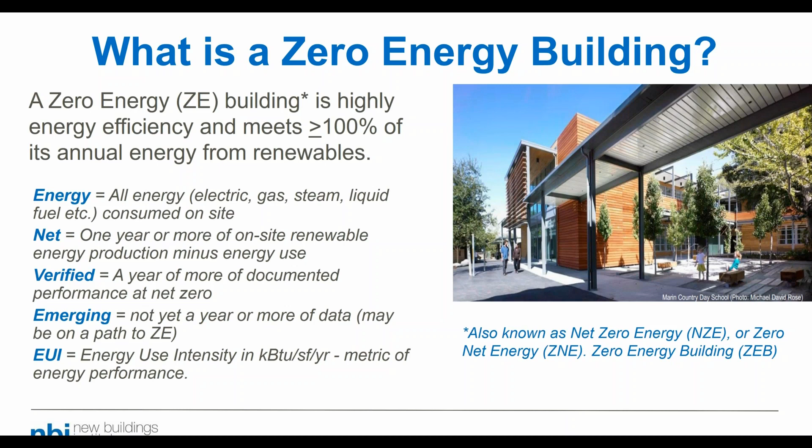When we talk about zero net carbon, this is a surrogate for the emissions impacts of the building and its operations, and maybe potentially including its construction. In this definition, for net zero carbon operations, it is taking that balance of the amount of energy used—the carbon impact of the energy used is equal to or less than the amount of carbon-free electricity generated or procured. This is the first theme you'll see throughout today's presentations: how cities, states, and other jurisdictions are beginning to address the carbon metric in building sector policy.

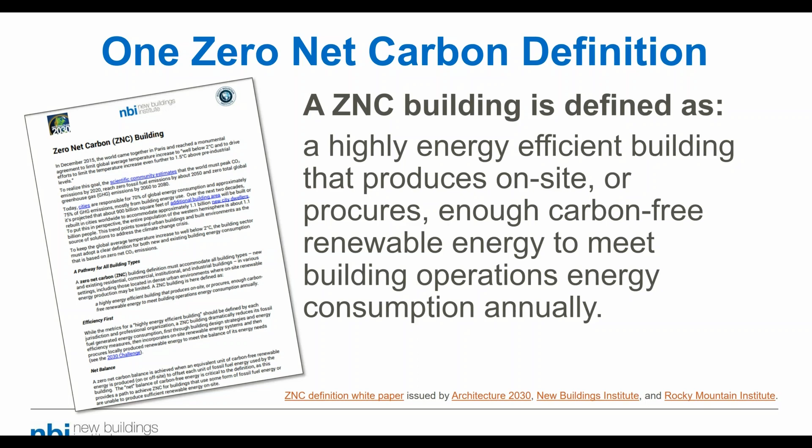Fortunately, there is an excellent publication that was just released in the past month by Adam Hinge for the International Partnership for Energy Efficiency Cooperation. This is an excellent summary of worldwide uses of zero energy and zero carbon definitions, and some summary of policies. We will have this link on our website after the presentation.

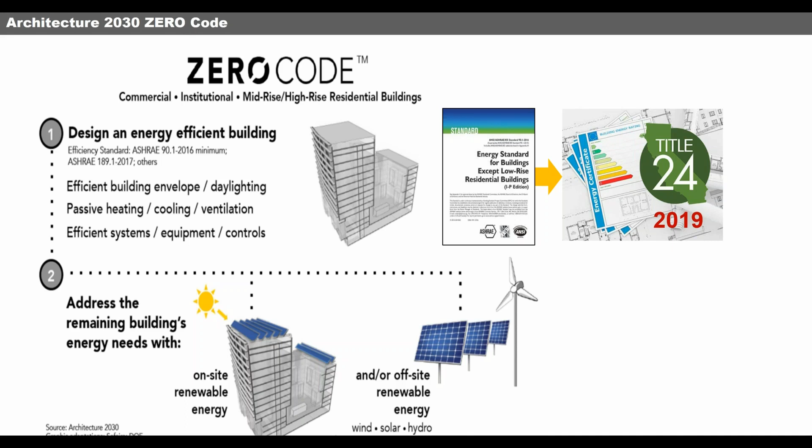The national and international Zero Code was released in April, and it's really pretty simple. The first thing you do is design your building to be in compliance with the latest version of 90.1. After that, you install on-site renewable energy, or you procure off-site renewable energy to get to zero.

The Zero Code is supported by a website. You can download the code and the supporting documents. There's also 2 energy calculators, one for California and one for the other parts of the country, that can help you determine how much energy can be generated or how much would need to be procured off-site.

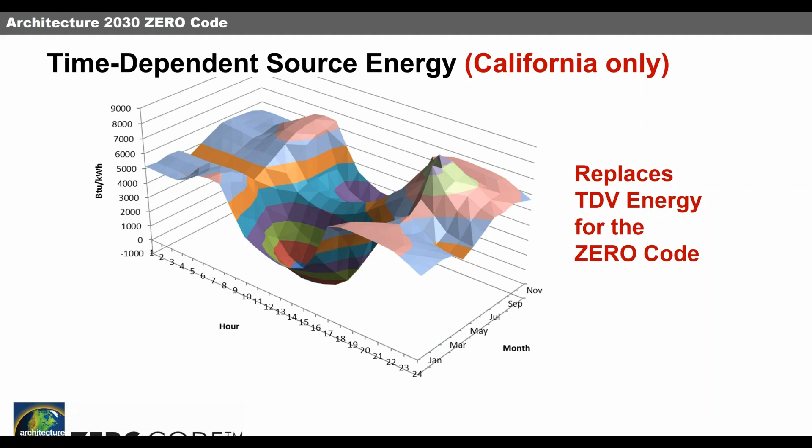Perhaps the most significant innovation with the California Zero Code is the metric we're using to measure energy performance and credit renewable energy. We're using what we call TDS, or time-dependent source energy. TDV, or time-dependent valued energy, is still used for code compliance, but the Zero Code uses TDS. As you'll see in a moment, it provides a strong incentive for grid harmonization and storage.

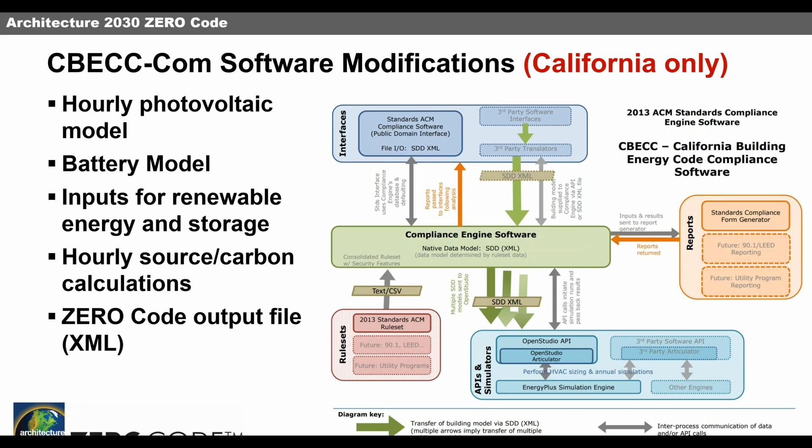Finally, we've worked with the CEC and the developers of CBECC-Com to add features to the official California software to support the Zero Code. This includes a model for PV, a battery model, and also you can look at multiple metrics, including TDS and TDV.

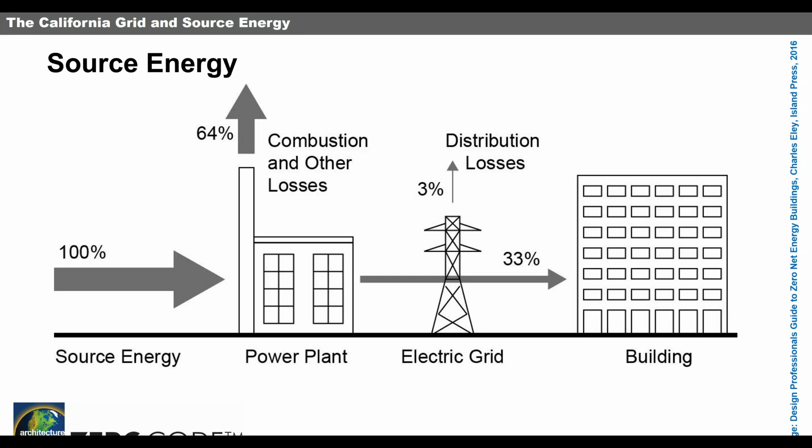Most of us are familiar with the concept of source energy, but with California we have a little bit different twist on the concept. With source energy, you look upstream at the energy used to generate the electricity, and you also consider the electricity lost in the process of transmission and distribution. This is, of course, a very simple diagram, like Thomas Edison's original Pearl Street system in New York.

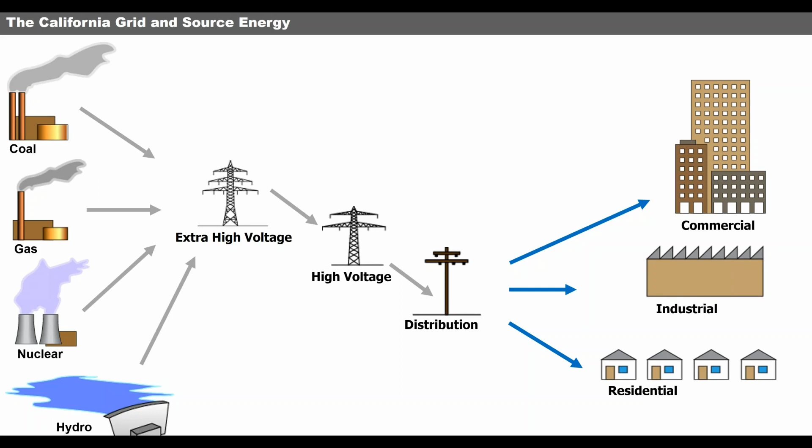But the modern electric grid is way more complicated than the original Pearl Street system. There are multiple generators of different types scattered around, often in remote locations, and these feed into high voltage transmission lines. This power is then stepped down to lower voltages as it reaches customers. Modern grids also have intermittent generators like wind and solar. Power has traditionally flowed in just one direction from central power plants to customers, but this is starting to change with Zero Energy buildings.

A couple of months ago, in May, California had 22 gigawatts of renewable energy on the grid, and solar represented more than half of this, with wind being a distant second.

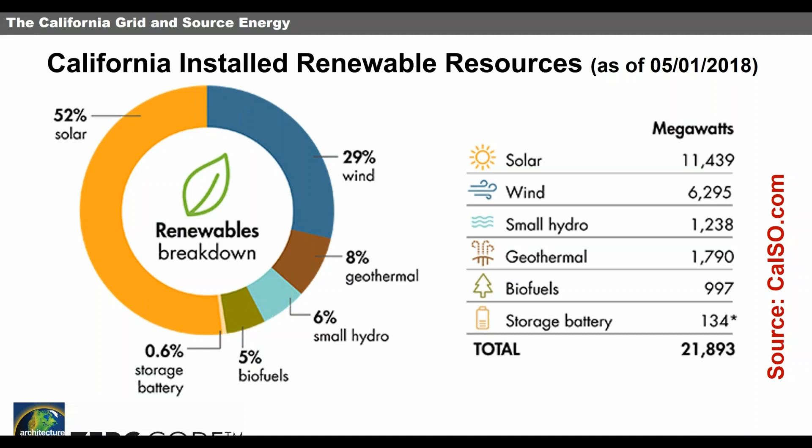In 2017, almost 30% of California's power was from eligible renewable energy sources, and in mid-September, Senate Bill 100 was signed by Governor Brown, calling for California to be 100% carbon-free by 2045. The bill also moves up the target for 50% from 2030 to 2026, and sets some other goals along the way. Right now, the renewable energy portfolios in California don't include large hydro, but for the 2045 goal, they of course will.

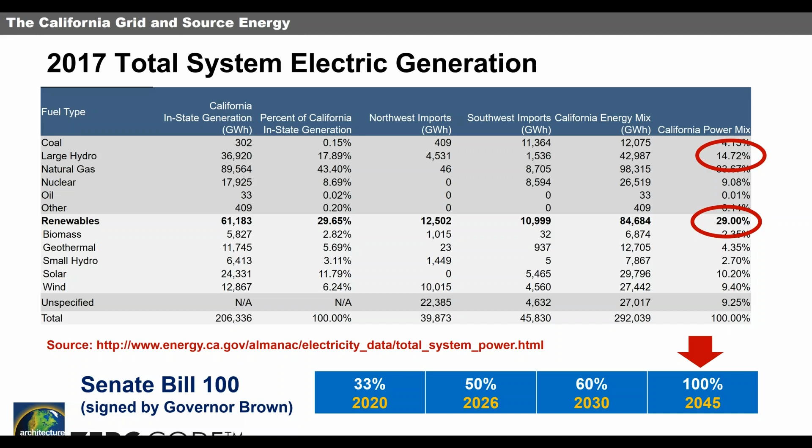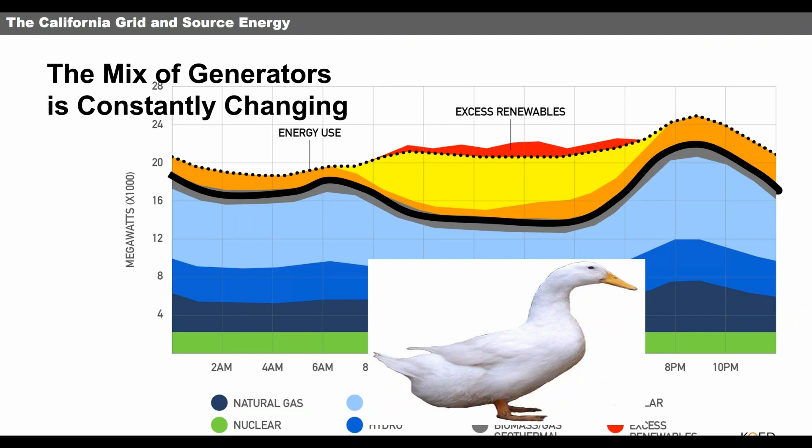This black line represents the net load that must be met by conventional or dispatchable generators, and the space between the solid line and the dotted line begins to form the infamous California duck, and I guess you could sort of see the resemblance.

So on this particular day, if you add load to the grid between about 9 in the morning and 6 at night, the marginal source energy would basically be zero, because that additional load would be met by taking off or reactivating some of the solar capability that's already been curtailed.

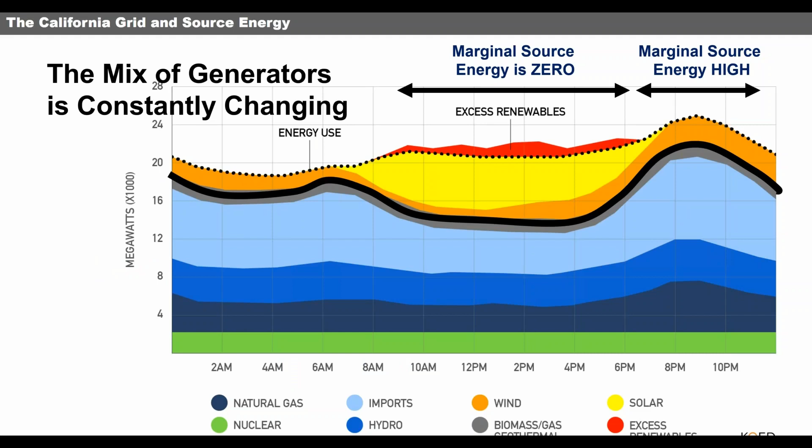However, in the early evening hours, when the sun goes down, the source energy is high, and the gas generators would come on to modulate things.

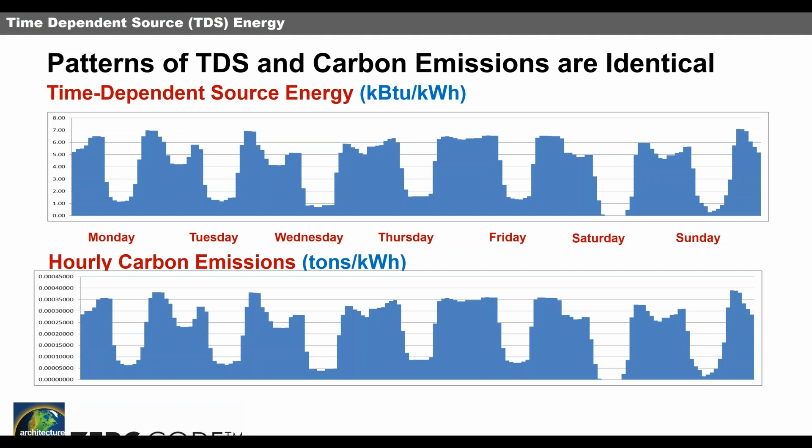So you may be wondering where we're going with all this. We're leading into time-dependent source energy. One of the important features of this is that TDS tracks carbon emissions on a near exact basis. The graph at the bottom shows carbon emissions, and the one at the top shows hourly source energy. Really the only difference between these graphs is the scale, so when carbon is low, so is source energy. You can see in this particular case, there's some curtailment on Saturday.

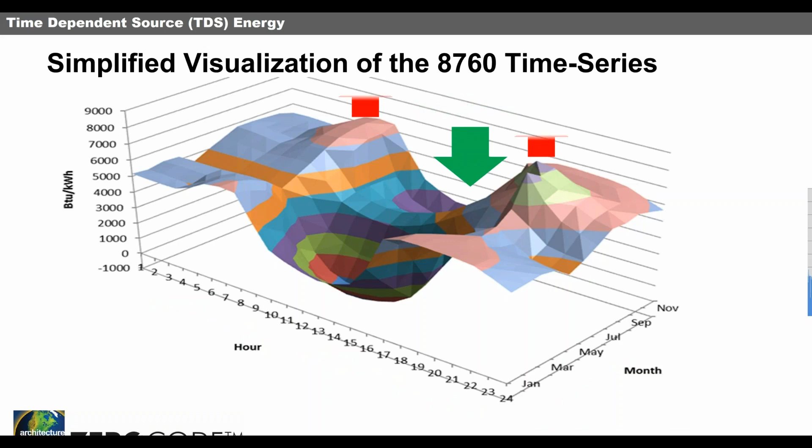TDS consists of an 8,760 time series, but it's easier to visualize this if you look at the average source energy for each month and each hour of the day, which this graph does. This shows how source energy dips in the middle of the day when all the solar comes online, and it also spikes in the morning and early evening when the sun goes down and buildings are still operated. So the lesson here is that during periods of high source energy or high carbon, we want to shift load, and this is what we think the Zero Code will encourage.

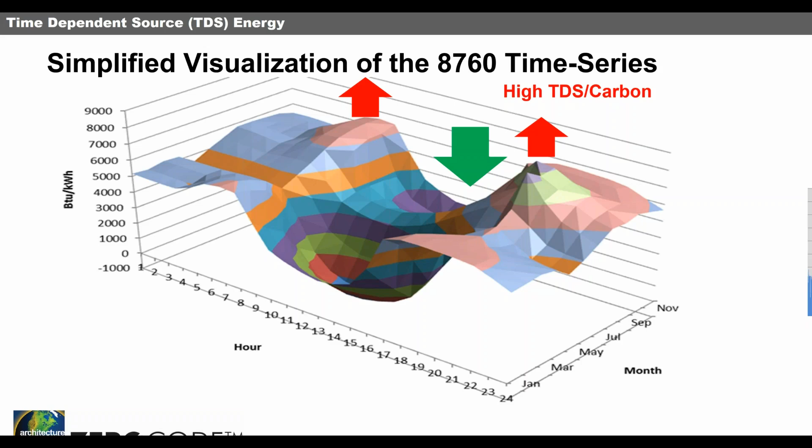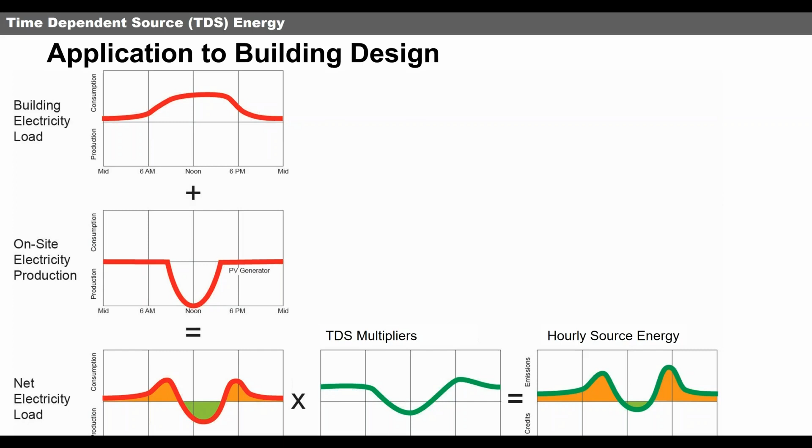So with site energy and most other flat metrics, a megawatt hour of renewable energy from wind, solar, or hydro are all considered equal. But this is no longer the case when TDS is the metric.

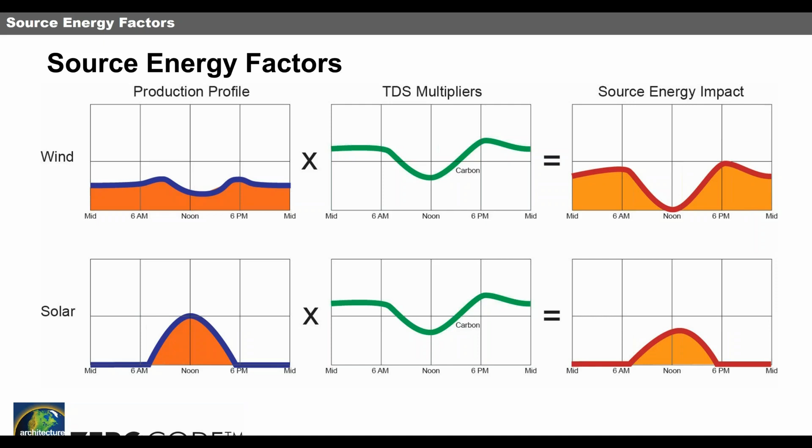This slide shows typical daily production for wind and solar. In California, wind typically peaks in the morning and in the afternoon with a lull in the middle of the day, while solar has a big hump in the middle of the day. So when the TDS multipliers are applied to this, the impact of wind is amplified and the impact of solar is reduced. This is the TDS curve that we previously described, or a representative of it.

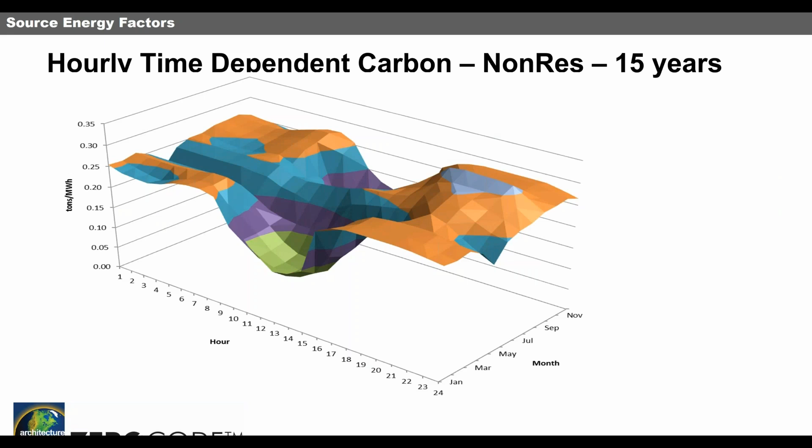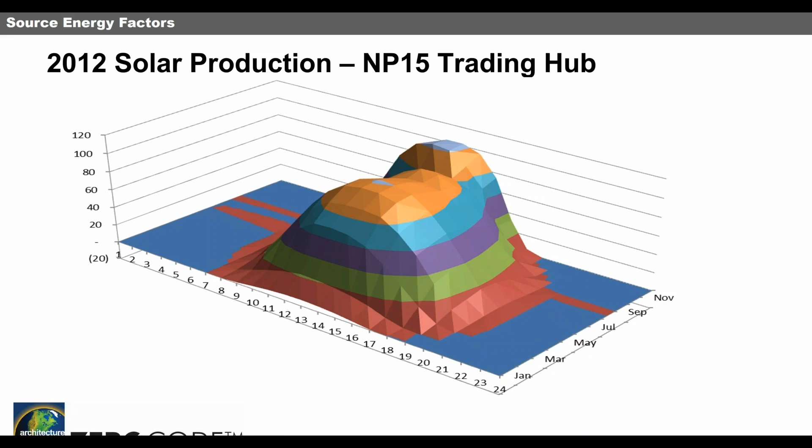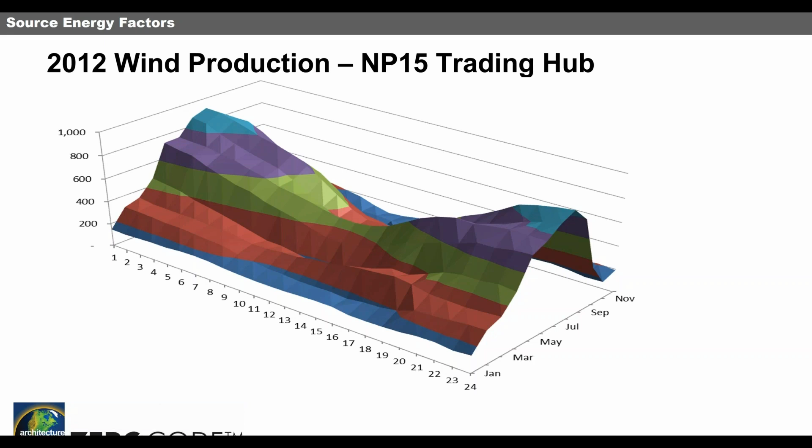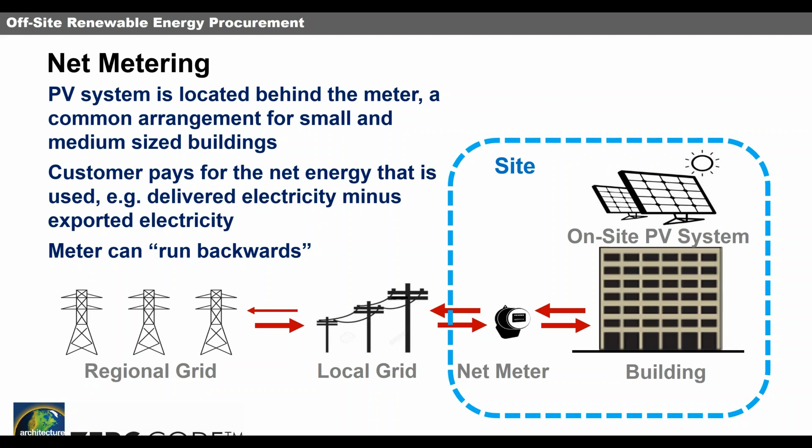So what I want to talk about now is offsite procurement. Net metering is the most common arrangement for small buildings. The customer pays for the net energy that's used. When PV production is less than building use, the PV system supplies the building, but otherwise the PV system can actually pump power directly into the grid, and in this case the meter can actually run backwards.

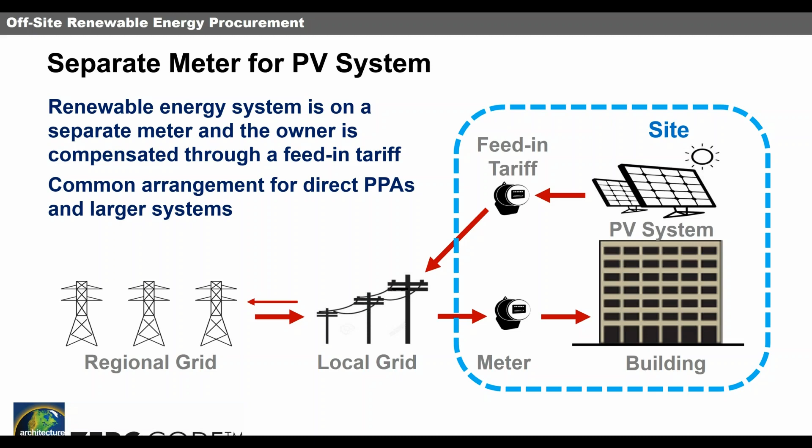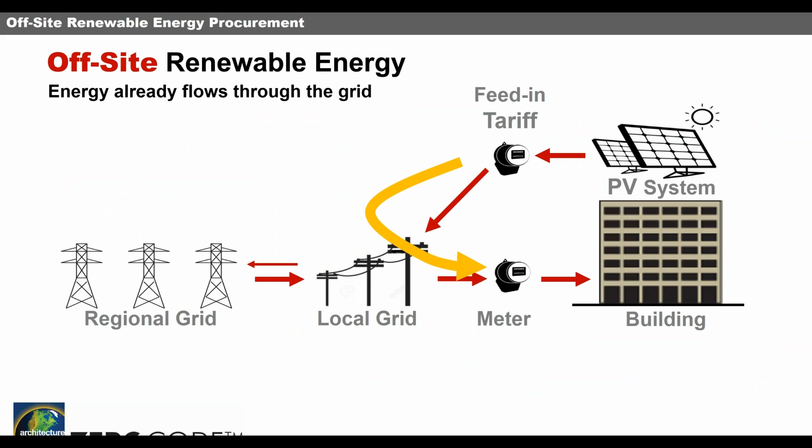So when the PV system has its own meter, we're already using the grid to deliver energy to the building. If we move that PV system off-site, but in the same general vicinity of the building, we can still deliver power to the building, and RECs can be used to track production and make sure that the renewable energy is not double counted, and assign it to our zero energy building.

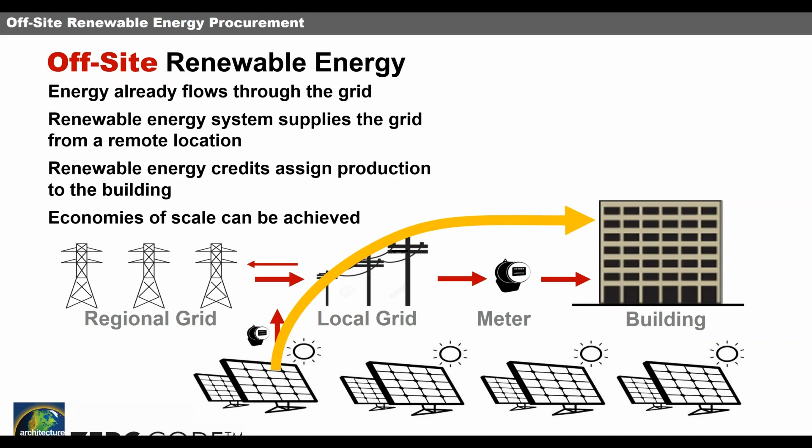So another benefit is when we move off-site, we can build larger systems that are shared by multiple buildings, and we can achieve the economies of scale. This is another benefit.

So there's a number of financial arrangements or procurement options that are already out there for off-site renewable energy, and some of these have been widely used by tech companies like Amazon and Google. We've grouped these into three classes based on the probability of additionality, long-term commitment, and other criteria. The first class has a pretty high probability of additional renewable energy and other benefits. The second class is less desirable.

This includes green tariffs and direct access to the wholesale market. The main problem here is that customers can easily opt out. Our least favorite option are unbundled RECs. We think these have little probability of additionality.

You can go to the Zero Code website and download a document that explains these options in way more detail.

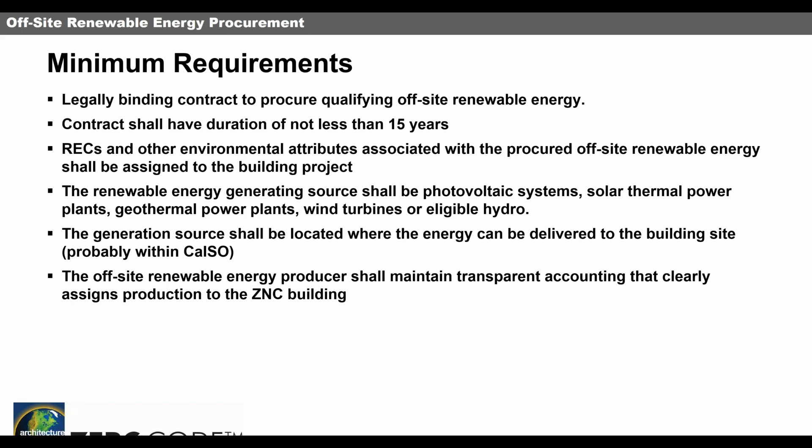So in creating the classes, we considered 9 criteria that we think are important, although some are more important than others. At the top of the list are additionality and long-term commitment, and some of the other things are at the bottom. We've also identified a number of minimum requirements that all of the procurement options must embrace: having a long-term commitment, a legally binding contract. The RECs have to come with it, and several other things that are mentioned here.

The Zero Code uses the concept of procurement factors to account for the additional risks associated with off-site procurement, and we have three separate factors, one for each class of procurement.

To illustrate how this works, you start with the quantity of renewable energy that's being purchased, then multiply it times the source energy factor, and then multiply again times the procurement factor, and the result is the avoided source energy that you can credit towards your building.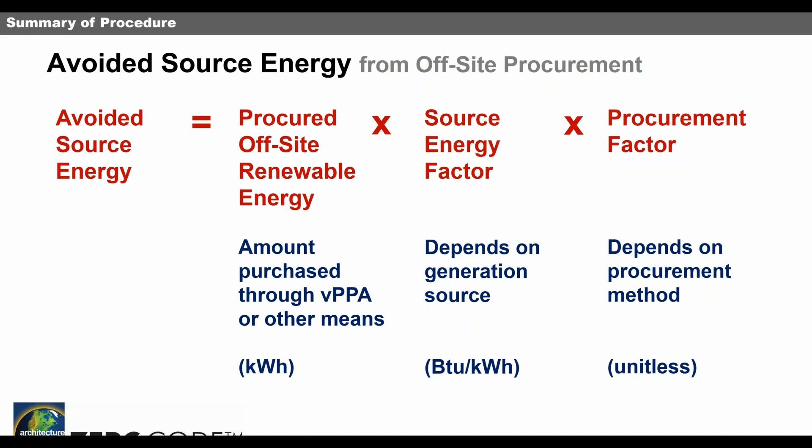It's a simple concept, and as we get more confidence in off-site procurement methods, I think the procurement factors will begin to approach 1. In some areas, they may already be close to 1 if we have a lot of confidence.

Batteries can be installed behind the meter, and you would typically charge the battery in the middle of the day when there's a lot of solar, and discharge the battery in the early evening and in the morning to offset that duck curve we saw earlier.

Conventional thermal mass can also be used to shift loads. In this case, you would operate in a manner just the opposite of convention - you would cool the building in the middle of the day when there's a lot of solar, and then let the building drift in the morning and the evening.

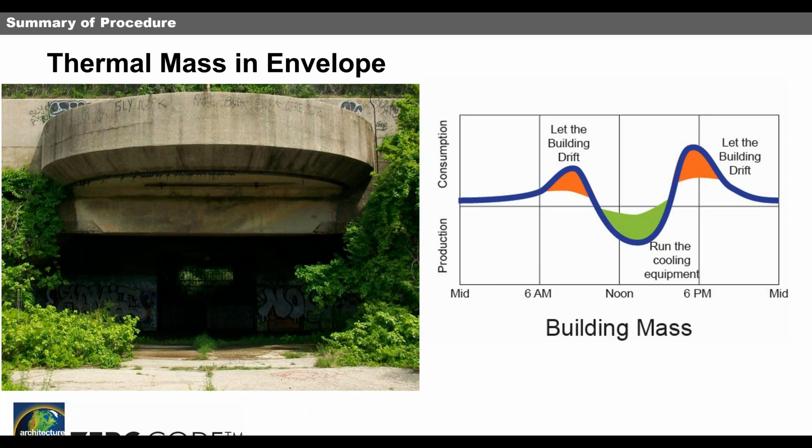Conventional thermal storage can also be used to shift load, but again you would operate it differently. Typically, with thermal storage, you make ice at night and melt it in the day. But with a solar-rich grid, you would do just the opposite - you would run the chillers and make ice in the middle of the day, then shut off the chillers in the morning and evening, and melt the ice during those times.

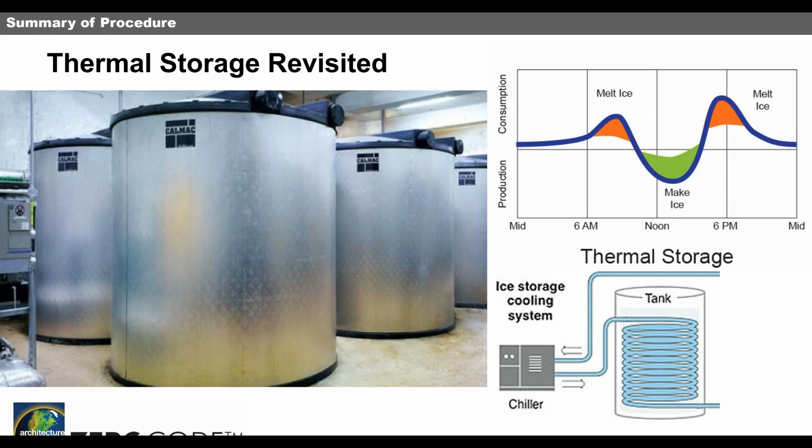Next slide, Connie. Next.

So anyway, the Zero Code for California represents, we think, a paradigm shift in that it directly addresses carbon emissions and encourages more grid-friendly buildings. And also with the offsite procurement, it establishes a framework for tall buildings and energy-intensive buildings that have always sort of been a problem.

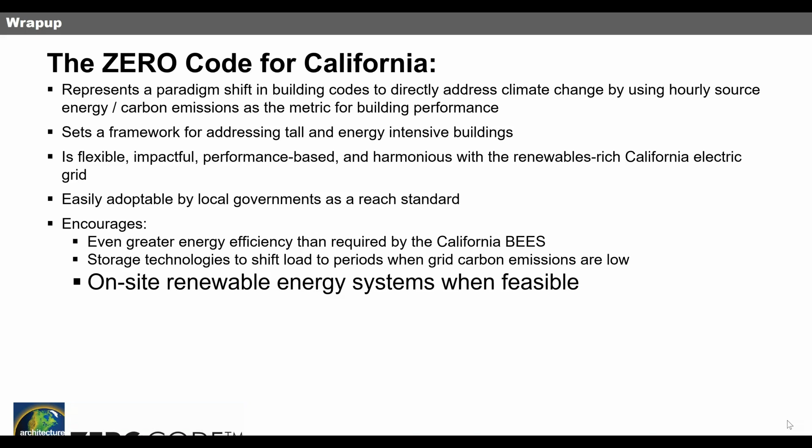If you're interested in learning more, there are several documents available at the website zero-code.org. You can download these documents and they have a lot of backup for what I presented. So anyway, thank you for your time and happy to answer any questions you have.

Thank you so much, Charles. Really excellent technical background for the topic of our webinar today. Having that technical understanding is really helpful to understand how we're going to be moving codes forward.

A couple of questions. One is, at this point, would it be useful or beneficial to orient solar systems to the west to help with the duck curve challenge in places like California?

Absolutely. The guidelines for the azimuth of solar collectors and also the tilt of solar collectors have been based on maximizing annual production. But if your goal is to maximize or offset the maximum amount of hourly source energy, you would consider different tilts and different azimuths. I think that opens up a whole new way of thinking about solar collectors. Tracking collectors look a lot better too, because they can face east in the morning and west in the afternoon, and they have a much higher capacity factor.

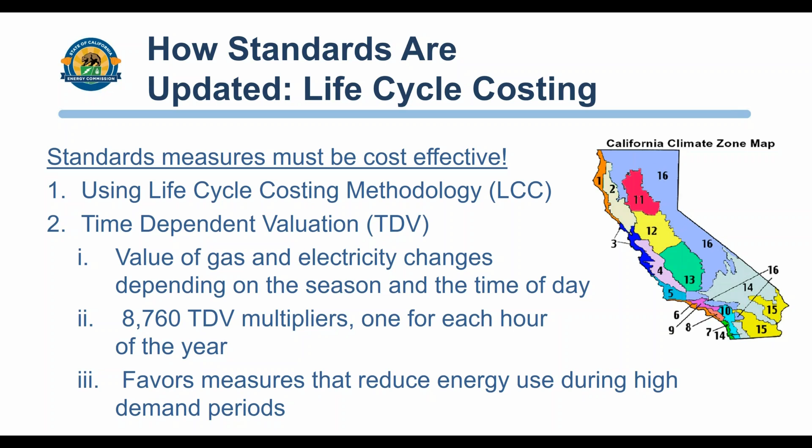Why don't we go to the next slide. I'm just going to go through these really quickly.

In 2019, on the non-res side, we really focused on going to the LED baseline, which was a huge savings, and then did a lot of clarification, including color temperature for indoor and outdoor lighting. Next.

For residential standards, we'll talk a little more about the PV separately, but one of the things we realized is that indoor air quality is one of the things we have to look at. If you have an efficient building and people can afford to run their HVAC systems and move air through, they can control bad indoor air quality.

That bad air quality can come from either indoor sources or outdoor sources. As we found, we were tightening up the buildings, you ended up with adverse indoor air quality issues, either from cooking or other indoor sources, or from outdoor sources such as pollution from vehicles.

So we found that you could actually have filters that went down to PM 2.5 without having energy penalties. That was a huge step we worked with ARB on.

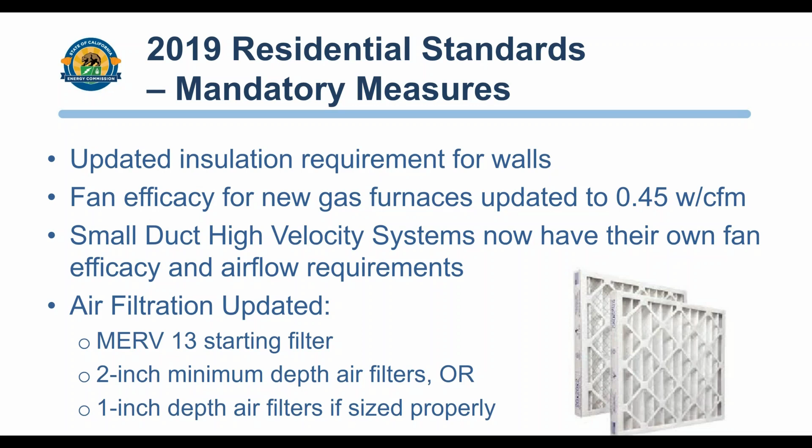That was a realization that we had to make sure the energy use in the buildings was such that people could afford to run their systems, so they didn't conserve energy in a way that caused an air quality impact. Next slide.

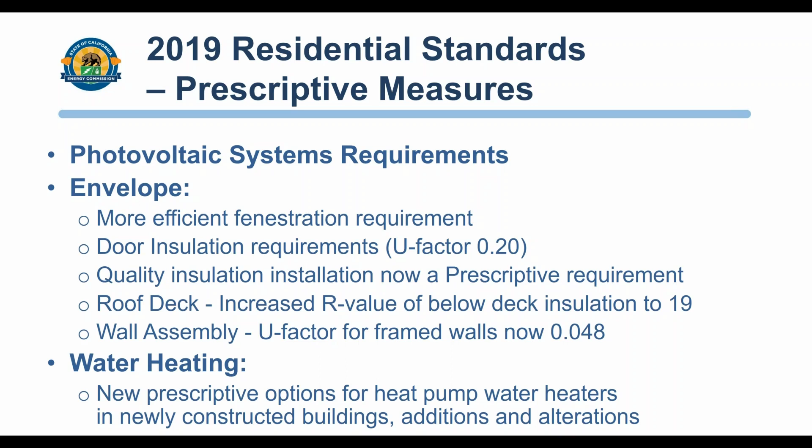One big thing we did for moving ahead to help with either electrification or GHG issues was to work really hard to remove any barriers to electric water heating through heat pumps. We've been doing a lot of work to try to make heat pumps as easy as possible to integrate in the climate zones where they make sense. Next.

So as you can imagine, we were really looking forward to going in the future towards the GHG reduction goals, cost effectiveness and energy in the 2019 standards, working with both stakeholders and other agencies.

We agreed early on with the PUC and CAISO that we didn't want an energy code that shifted the burden onto the PUC to deal with grid harmonization issues. We had to make sure that what we did promoted demand flexibility. And when we talk about self-utilization, we're really talking about designing a code that looked at behind the meter PV on residential houses as a load minimizing strategy.

Christopher? Yeah, sorry, I'm getting some feedback from people that they're having a difficult time hearing you. Can you get closer to the mic or speak up, please? Okay, apologies. Is that a little bit better, hopefully? Yes, it is, thank you.

So anyway, as I was saying, we're trying very hard in the 2019 code to have the house interact with the grid as little as possible. So we're using behind the meter PV as a conservation measure to minimize the load of that house that the utilities need to deal with as far as grid or infrastructure increases that would have possible socialized cost implementation issues with non-participants.

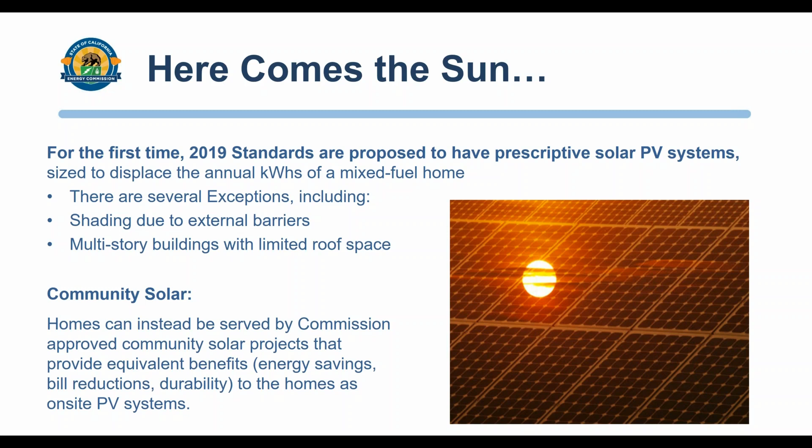One of the things we did in our research version of our CBECC modeling software is for 2019, we added a feature so that you could model the building based on energy efficiency, but also look at how that impacted the CO2 emissions of that house. So you could, in the future, look towards low GHG emission houses and see how well you could do getting emissions down within the authority the Energy Commission has on cost-effective efficiency measures, because as you all know, Warren Alquist is pretty clear on what our authority is, and it doesn't, at this point, include the ability to have measures based on greenhouse gases.

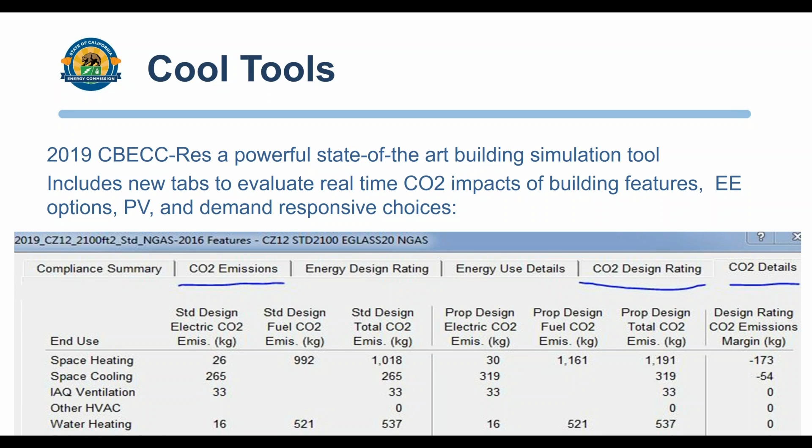We still have to do cost-effective energy efficiency measures. Christopher, again, please speak up a little bit more. Thank you, okay, sorry, I think I'm going to hold on just one moment. Can you hear me better now? Oh, that's very much better. Thank you, okay, so I'm abandoning the headset and we'll do this old school.

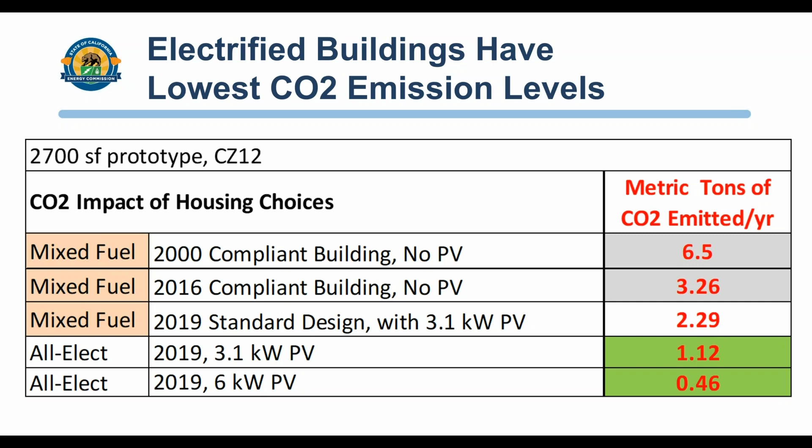Basically, as we're looking forward with AB 3232 and other policy goals to move towards a more GHG metric, we're working on how we can do that within our authority. But luckily, we found that by focusing on energy efficiency of the building and having as much of the consumption of buildings met by renewable energy sources, we can get very close to those GHG goals.

And once again, we're trying to get away from this idea of netting. We don't want to inadvertently use an accounting exercise to solve an engineering problem. As you can imagine, we don't want a house that has a large PV system that exports a lot of energy to the grid that the utility has to deal with, and then uses a lot of energy during the utility peak, and it all nets out to zero. So we want to make sure that the house is acting as responsibly as possible, using as much energy on site as possible if they have a behind the meter PV system.

So next. This gives people just a brief idea of what our schedule is. As we're finishing up 2019, getting ready for that to go online, we're already starting our 2022 standards. So by the end of 2019, we're going to start having the IOU hosted workshops on where we're going in 2022. And we basically value the participation of all stakeholders from different backgrounds, different ideas, so that we can have a really fruitful standards process. So thank you very much.

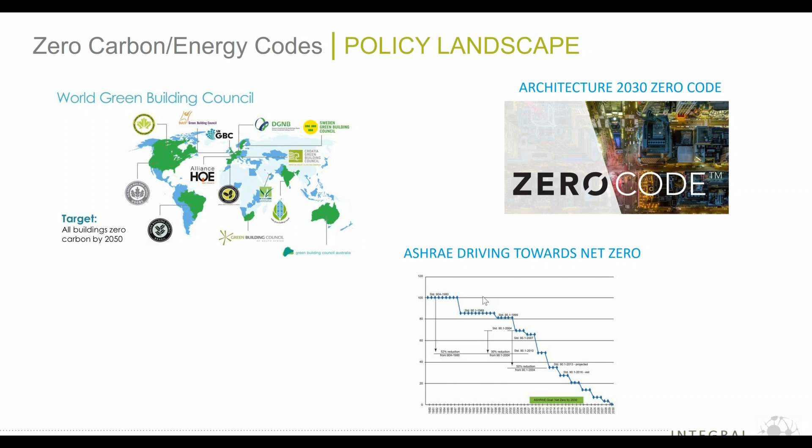So the Zero Carbon Building Standard - this was developed for the Canada Green Building Council. It's currently in pilot phase. There's a number of projects running through the standard in pilot mode, and I think the intent is to take it from there and make it a bigger program after the pilot phase. It's really focused around performance, and in particular this concept of the TEDI, the thermal energy demand intensity of a building. It's really focused on driving those loads down and focusing on the building envelopes to make them more efficient, so that when you're trying to get to zero, the amount of renewable energy you have to either put on site or procure from the grid is lowered. There's also the benefit that increased building envelope efficiency helps to soften some of those duck curve issues that Charles talked about earlier.

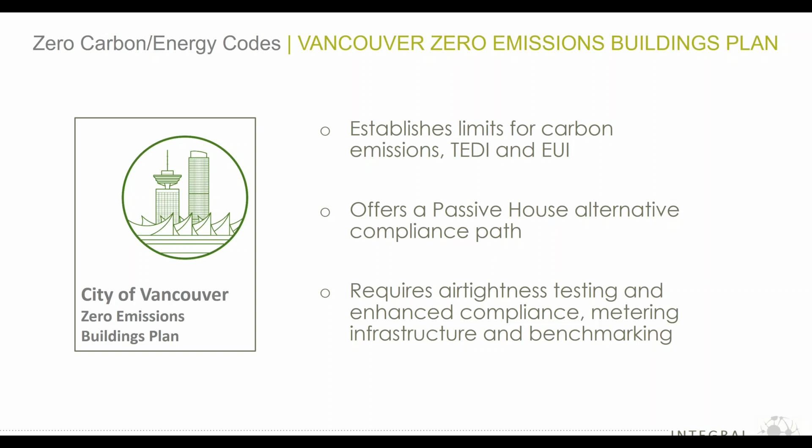This is the Vancouver Zero Emissions Building Plan. Similarly, it establishes limits for carbon emissions for the thermal energy demand intensity, the TEDI, and EUI. It does offer an alternative compliance path for passive house, and requires good quality testing for air tightness, enhanced compliance, as well as metering infrastructure and benchmarking of buildings.

Similarly, I guess in some ways but slightly different, in Toronto there's the Zero Emissions Building Framework. The concept here - and I'll talk a little bit more about this in the next slide - is showing the pathway to get to zero emissions by 2030 through these stepped goals in terms of the framework. So having stepped greenhouse gas and energy targets from the time the framework was put together to 2030, to kind of ease the transition over time to get to zero emissions for the city of Toronto. There's both performance and a set of prescriptive requirements in this framework, and it also includes a climate change resilience checklist for buildings, which I think is a nice innovation and really important if we're trying to make our buildings both climate friendly from a mitigation perspective, but also able to handle some of the impacts that are coming our way.

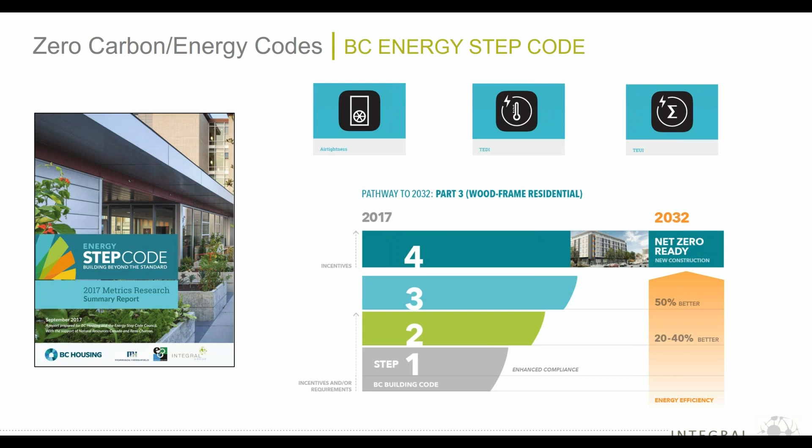So this is the BC Energy Step Code - this is for British Columbia, for those of you who don't know the acronym BC. Similar to what I just mentioned for Toronto, this idea of having a step code, or this pathway to get to net zero, or in this case net zero ready for new construction in the codes over time, outlining that over the next few years to get to their 2032 goal of net zero ready for new construction in the code there. Similarly, there's a standard for air tightness, for TEDI, and for total energy use intensity as well.

So I'm going to talk a little bit more specifically about what's happening in DC, because this is a code that was just introduced for public comment in September of this year.

Prior to joining Integral Group, I managed green building and climate policy and programs for the city government in Washington, DC. The city has a strong history of progressive green building policy dating back to 2006 with the landmark Green Building Act, and an energy and water benchmarking law in 2008, which was the first in the US, along with a lot of things around renewable energy and finance.

This year was the release of the Clean Energy DC plan, which is the energy and climate plan for the city. It was a project that Integral Group did for DC, and it's relevant to this conversation because it puts some date targets in for a zero code requirement for DC. That proposed zero code is out for public comment right now, so I'll talk a little bit more about that.

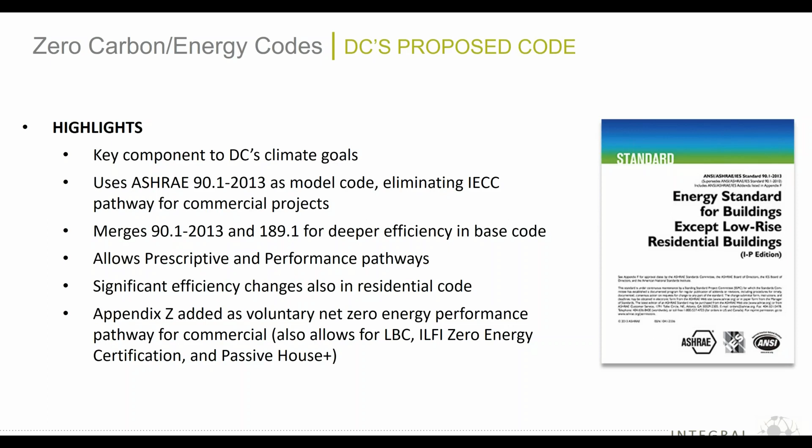Great. So these are some of the savings in terms of percent reductions proposed over 90.1 2010.

So just digging in a little deeper on Appendix Z, the beauty of this is it's outcome-based and performance-based code, so it's 6 pages versus the baseline code, which is certainly over 100 pages. The goal of the code intent in DC to get to this zero energy code requirement is really to move into this performance-based model where we have a much cleaner way to comply with the code.

We are using the zEPI tool, targeted at a score of 40 or lower. The base code, since 2016 had just come out, actually adopts Appendix G of 2016 as the performance path for the base code, plus the use of ComNet, which is also adopted for Appendix Z.

There are thermal energy performance targets. We don't call them TEDI like in Canada, but there are thermal energy performance targets in the code, and you can see them there. There's some guidance around how to account for multiple buildings using district energy systems, and a requirement for using a registered design professional for building energy simulations for quality control.

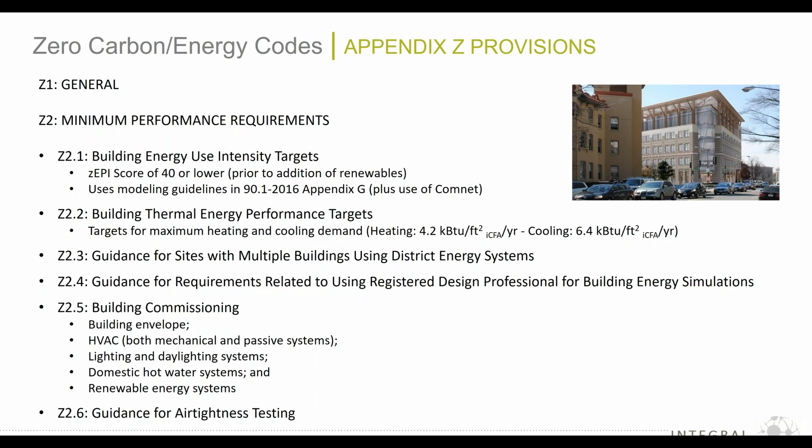Both the baseline code and Appendix Z require building envelope commissioning—this is our first effort at requiring that. So that's in the base energy code, but also in Appendix Z as well. There's guidance for air tightness testing.

As well as guidance for renewable energy. We're not allowing on-site combustion at this point. I don't know if that will change when the zero energy code or zero carbon code becomes mandatory, but currently on-site combustion is not allowed. You see the list of acceptable sources of renewable energy, biogases, on there, but it would only be allowed to be used in a non-combustion technology like a fuel cell.

And then there's guidance around how folks can go off-site for renewable energy after they've maximized on-site for the larger buildings in the city. We also have information and guidance requirements around energy metering and monitoring in the buildings, as well as reporting. Like I mentioned, this is an outcome-based code.

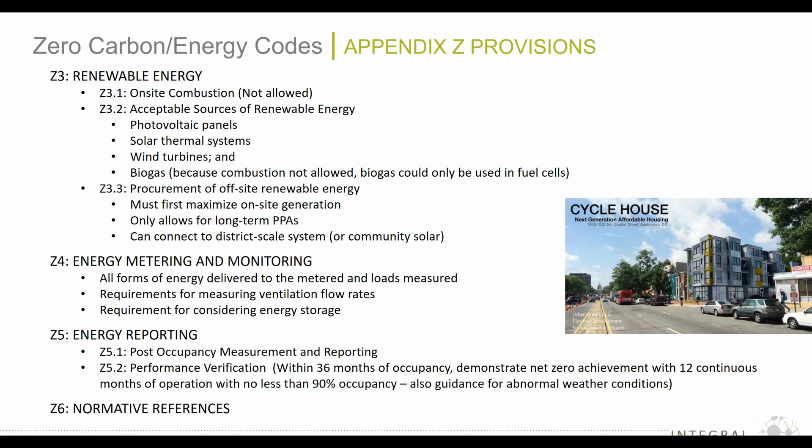It's different from the Architecture 2030 Zero code, focused around actual performance and outcome. Part of the reason why we built it as an outcome-based code is because we were talking about tying significant structural and financial incentives to this, and we wanted to make sure the buildings were going to actually perform to what they were designed to be, and not miss the mark, because it would not be good from a political perspective to have provided somebody with an incentive and have the building not meet the mark.

I think you've heard most of this already from the other presenters, but this shift is already moving towards absolute metrics, a real focus on carbon, and managing emerging loads and grid optimization. I think we're going to see more legislated fuel switching from gas to electric, obviously more decarbonized grids, and in particular, to address peak demand and issues like the duck curve in California and other places, you're going to see quite more focus around distributed energy resources.

So I think that's it for me. I appreciate it and am happy to answer any questions.